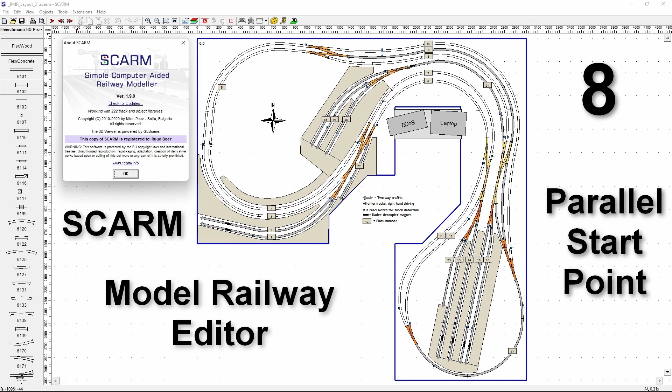Welcome to video 8 on the SCARM Model Railway Editor. Let's have a closer look at how parallel start points can save our day when designing a layout.

If you're working with a track system that consists of predefined track pieces, like for instance over here Märklin C track, then the curves that you get are all predefined and they have their standard radius, which is exactly matched to one turnout combination. And all will go fully automatic, more or less.

But what happens if you use a brand like Peco or Tillig that uses solely flex rail? Then these curves are not predefined, we have to bend them ourselves. And how can we keep the exact distance? That is where the parallel start point comes in very handy.

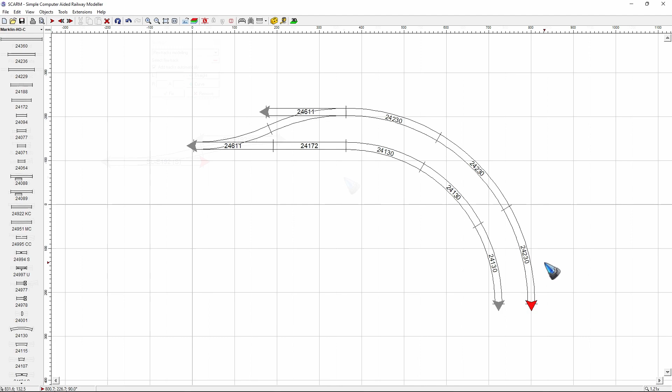Let's have a look. Alright, so now we have changed our track to Peco 75 and that has only flex track. And we want to do the same. I already laid down two of these turnouts in this combination, just like we did with the Märklin a while ago. And I want to make a double track curve here down. The first question already is, what is the length to get from here to exactly there? We have to cut the rails ourselves, so we better have a look.

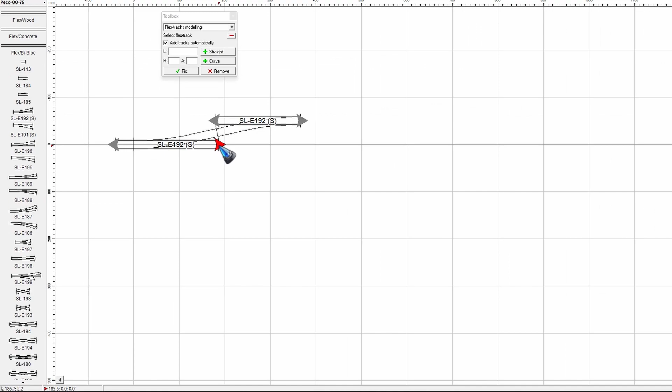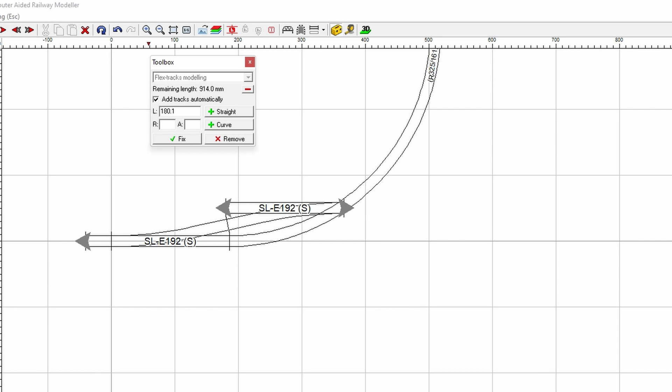Luckily, we can read out the coordinate of this point here at the bottom, 185.5. This coordinate reads 365.6. The difference, if I quickly calculate that, is 180.1. So let me cut a 180.1 in the toolbox flex rail. There we go, straight and fix, and there it is. Now we have them perfectly aligned and I can already start my first curve.

Let's do this one somewhat like that. And now I want to lay the next curve, but the question is, where should I go? We can eyeball it more or less, but I like to be 100% accurate. So what can we do? Well, what we can do is make a parallel start point based on this one and place it over there such that it exactly fits.

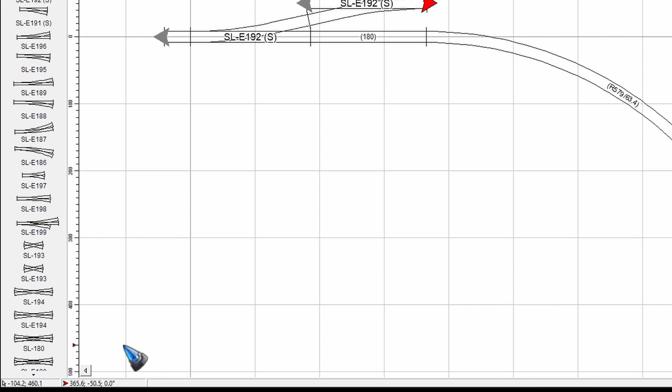So the first question is, when I have a turnout combination like this, what is my track distance with the Peco 75 track? Well, again, our coordinate system here at the bottom comes to the rescue. I started at 0 and now it is at 50.5. That means that is my track distance. I'm now going to make a parallel start point over here. Right click and then parallel start point. And the distance is 50.5. I just figured that out.

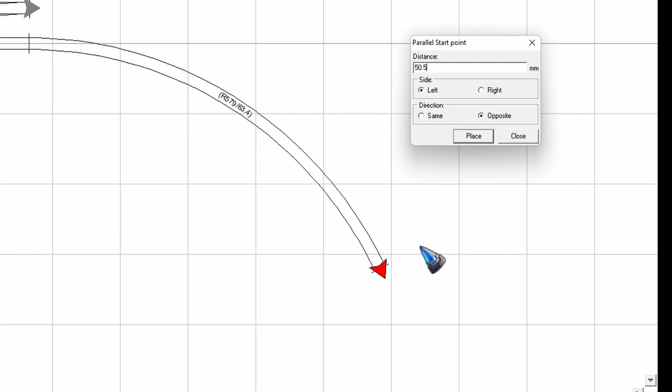I have to take care, is it left or right? Well, we want it at this side, which seen from this arrow is on the left, and I want it to point the other direction, which means opposite. I can place it, fix it, and there it is. The exact track distance of 50.5 that we need. And now I can hit the spacebar and connect my flex track and it will be 100% accurate.

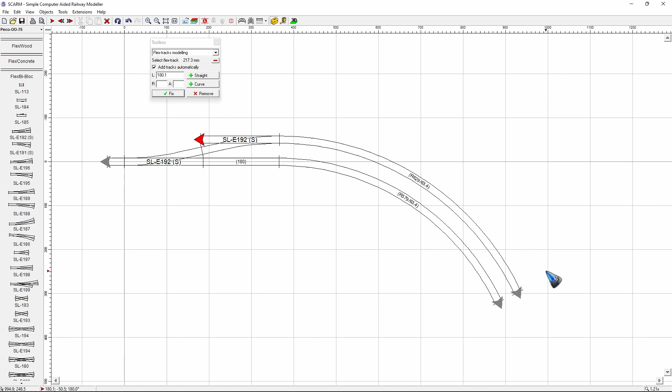Well, let's do a little bit more. Suppose that we would like to create a railway station over here with a platform on, let's say, double the standard track distance. What we can do first is create a straight track over here. And we could already create another straight track over there. And I was too soon with that, let me move that out of the way. I want a platform in between.

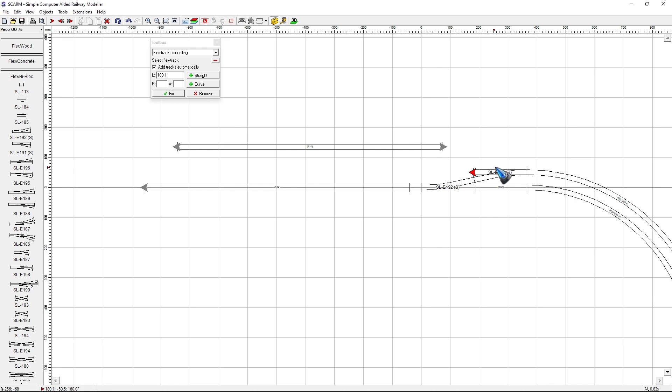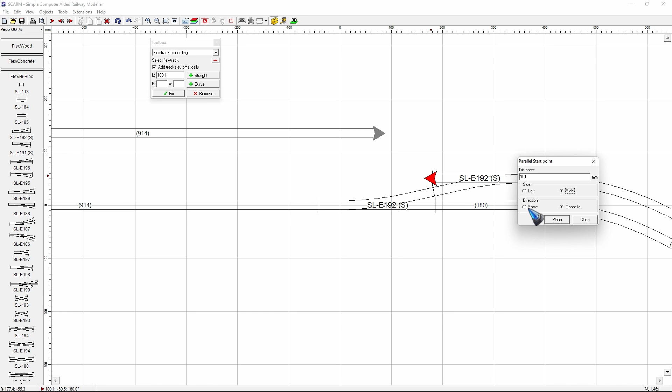So again, we are going to make a parallel start point, a right click, parallel start point. This time I want double the distance or maybe 120, why not? No, 101 is exactly double the distance. Let's figure out where we want to have it. Over there, that is on the right, and this time in the same direction, like that, place and close. There it is. And I can now connect this rail to it, and then we already see how our station is going to look like. Yeah, that's great.

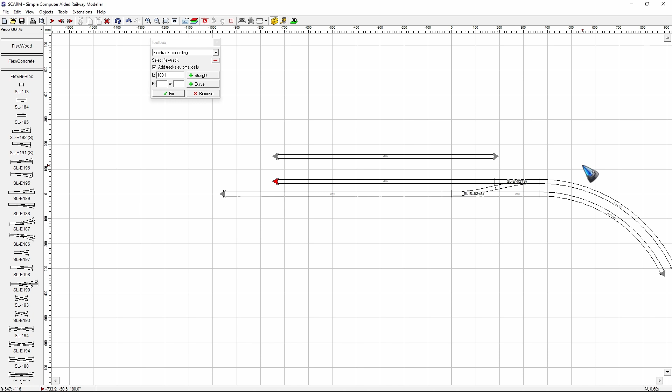Maybe this is a dead end track, I don't know, but we are going to build a platform here. But now I have to get my turnout such that I can get there. Well, let's do the first turnout and assume that we come from a curve. Then this turnout would be the perfect one.

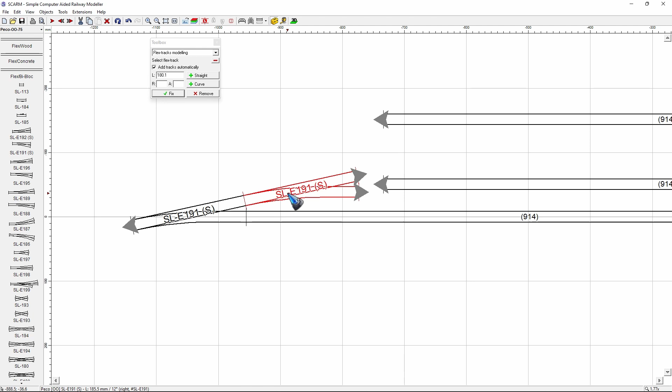If I now immediately connect a turnout like this, what we see now is, the track distance is not okay. Obviously, we need a little bit of a straight here in between, but the question is again, how long? Well, that we can again eyeball, but that is not very nice.

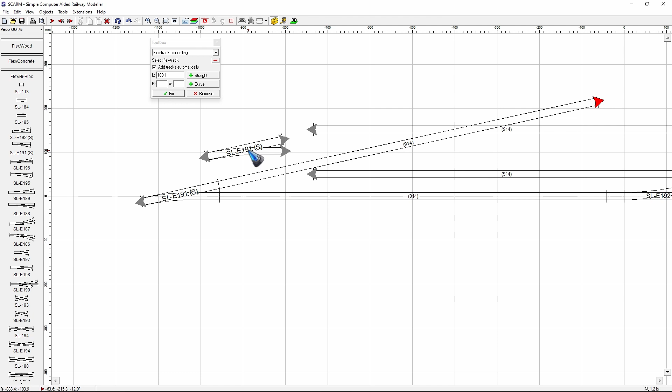The solution that I always use is just add another track, keep it straight, like this, and then maybe add another track here also, why not? Keep it straight, and then add your turnout, move your turnout and try to zoom in as far as possible, and then click control left click, and then we can eyeball it that it is exactly on top.

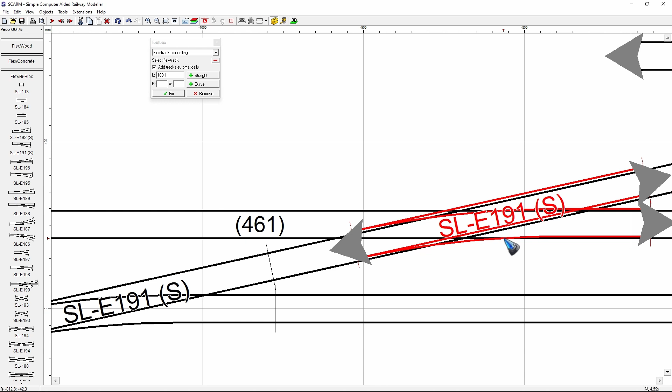Well, let me zoom out a bit and zoom in a bit again, that I can see exactly what I'm doing. This should do it, a bit to the right. This is accurate enough. What we can do now is left click to select, and then a right click and reshape, and then we can connect this rail.

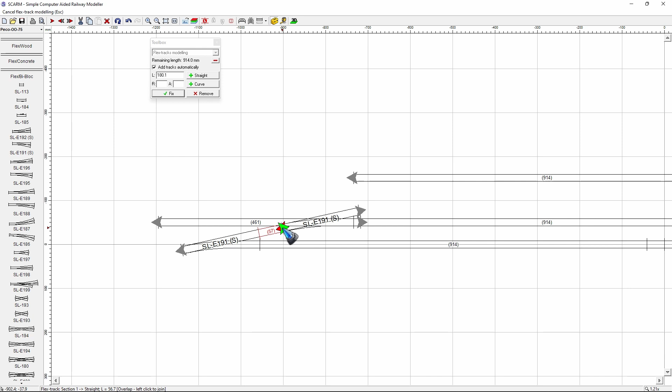That's okay, and we do the exact same. This one is not needed anymore, and this one is long enough. A right click and reshape and connect that. Now we see over here the correct length, so the next time we know that it is 57, and it will be less work.

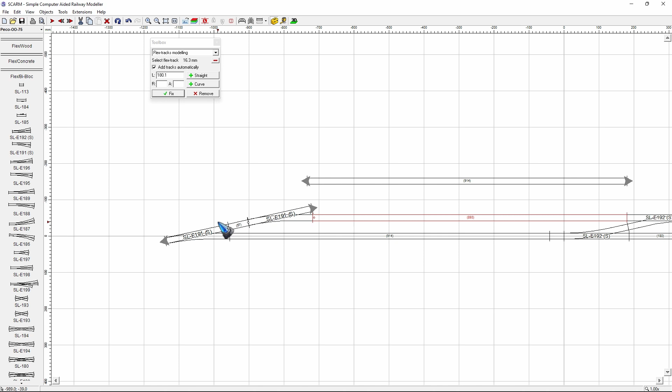We have to do the same over here to make a nice little curve over here. What I'm going to do is again use this as a sort of jig. What I like is a curve with a radius of at least 600. Why not exactly 600?

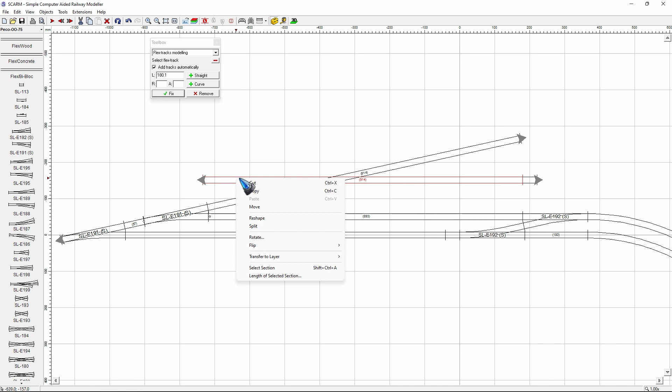Or what we can also do is put a little helper rail on there, and then make this thing a bit shorter, reshape, make it shorter. Let's say we go exactly until that vertical line touches the other rail like this, and there we fix it. And then we reshape this one, and that should automatically find its partner, and that has a very nice radius. That's one way of doing it.

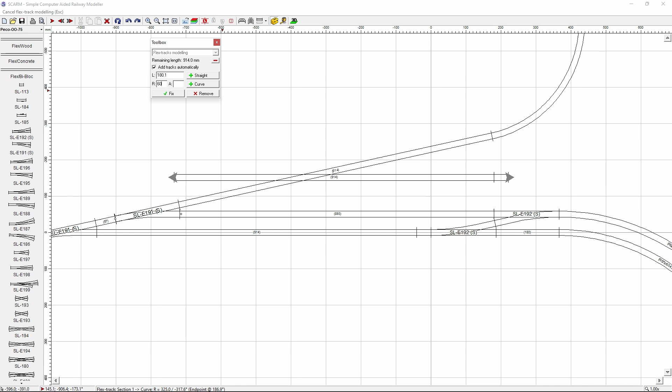If you want an exact radius, let's go back then to this situation. We want an exact radius. Then we first create the radius that we want. Let's say we want exactly 600, and I happen to know that the turnouts are 12 degrees. So make a curve of 12 degrees, and there it is.

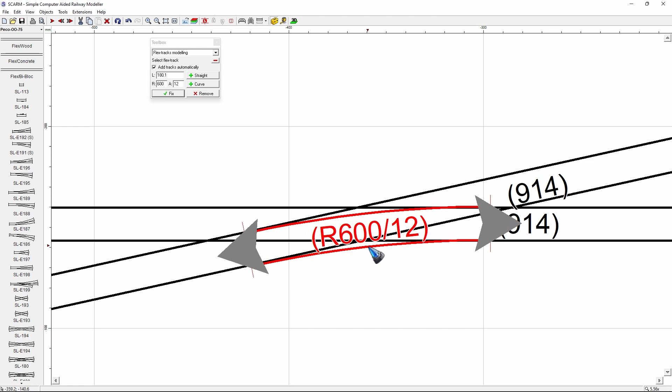And now, in exactly the same method as we did with the turnout, we just maximize, zoom in, and then try to pick it up and place it as accurately as possible. I think this should do it. And now we can again reshape both rails.

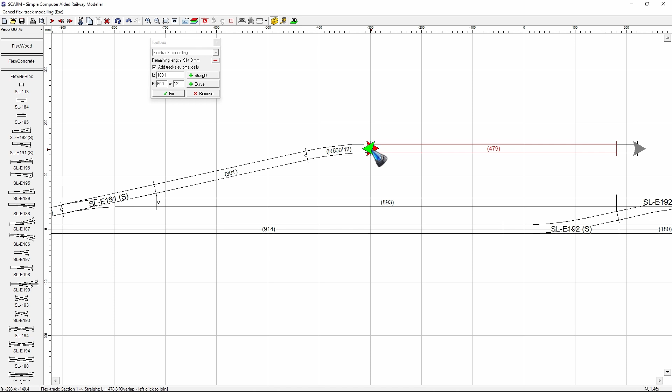Right click, reshape, that should be able to find them. And this one we can also right click and reshape, and it should be able to find it. And that is the exact curve. Two methods to do this.

Anyhow, in quite a lot of situations, your parallel start point can come to the rescue when using flex rail. Of course, you can also eyeball it and try to make it accurate enough, but I like to work precise.